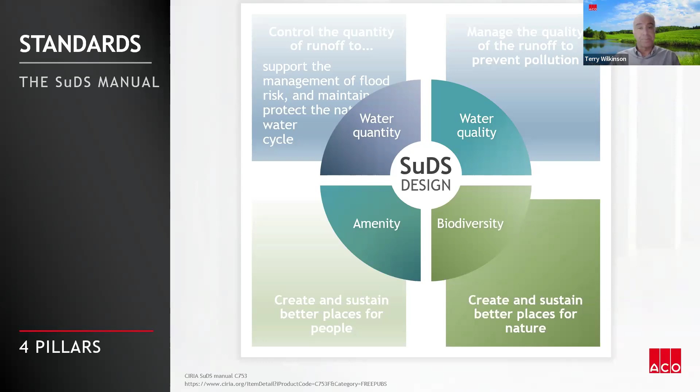Just to set the scene, I'd like to highlight the natural water cycle and the effects of urbanization and development over a number of years, and how that impacts how we think about dealing with rainfall and water.

Increased urbanization and impermeable surfaces means we get less infiltration of water into the ground and soil, because we've created these impermeable areas, creating more runoff. Lower infiltration means less water percolation and flow into the ground, and increased runoff from the surface, which also increases the risk of flash flooding further downstream.

So essentially, we need to try and find a balance with nature, enhance the natural systems around us, and really try to mimic as closely as possible what happens in the natural state, and treat and utilize water as that resource.

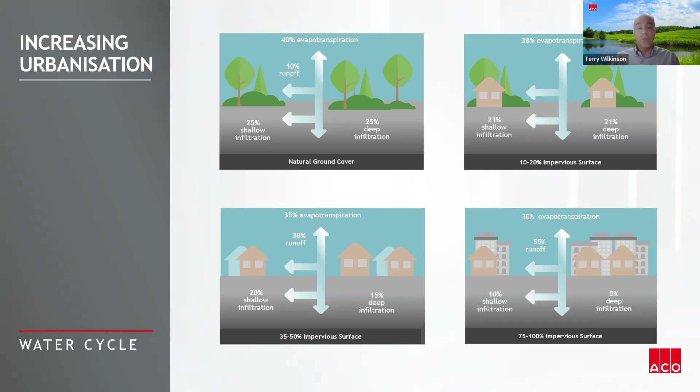As I've said, one of the main SuDS principles is that rainfall should be managed at or as closely as possible to where it falls on the ground, so we look at controlling the volumes and rate of runoff effectively.

We make sure we take every opportunity to reuse, infiltrate, evaporate and evapotranspirate as part of that natural water cycle. Looking at things like harvesting water for use on site at a later time has multiple benefits in terms of reducing the volume of water and potable water demand. So we really need to look to infiltrate into the ground wherever possible and utilize nature-based solutions.

As you'll see through some of the demonstrations and slides I go through, the preference, the first preference, is really to look towards nature-based solutions.

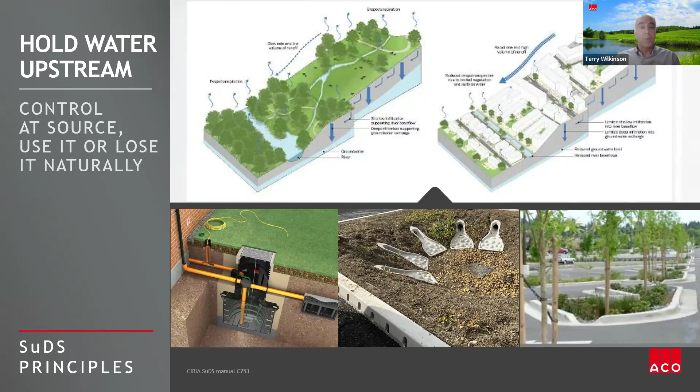Often there's a need to integrate that with engineered solutions as well, when we've got constraints, particularly in terms of things like the footprint of the site and the scope of what we can fit onto the site. Also, when we're looking to protect our natural systems, proprietary treatment systems can be used in tandem with them to utilize the benefits. This really comes into the requirements of SuDS as well. Just a few photos on this slide showing some simple examples of how these principles can be exploited.

Legislation on SuDS varies quite considerably across the UK and Ireland. Wales, for example, has had the implementation of Schedule 3 of the Flood and Water Management Act in force since 2019, requiring SuDS to be used on sites of more than 100 square metres on new sites.

There's a general requirement in Scotland for SuDS, and has been for a number of years. Within Northern Ireland, there's no automatic right anymore to connect new developments to the existing drainage networks.

England has fallen or lagged a bit behind some of the other countries in terms of SuDS. It was the start of last year, 2023, when it was announced that implementation of Schedule 3 would be in place within England by 2024. Obviously, we're almost at the end of 2024 now, and we've heard very little about that since. So hopefully it will still happen, but it's looking like it's being moved back a bit.

Within Ireland, SuDS is required on new developments, except where developers can demonstrate that it's impractical to use them due to site constraints and circumstances. But we're seeing a number of authorities in Ireland now that include recommendations to incorporate and implement SuDS in new developments - Dublin City Council and Wicklow County Council, just a couple of examples. I'm starting to see that more and more there as well.

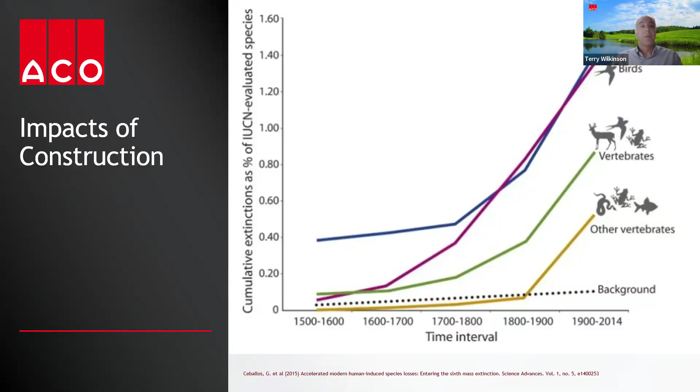Fragmentation is a particularly big issue in terms of species and their ability to move around. Amphibian populations, for example, spend a certain amount of time within ponds and water areas for breeding, but outside of those areas they're land-based and need to move around. So with linear infrastructure like roads and railways, it's had a significant impact in terms of fragmentation, severing the link and the ability of wildlife to move around our networks and roads.

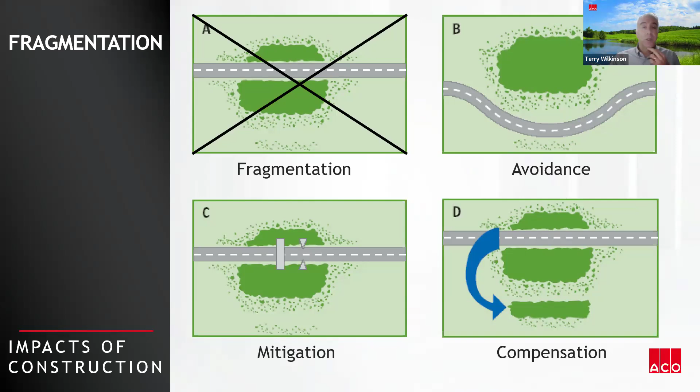So I've mentioned decline - just to highlight a few particular species, particularly in terms of Ireland. Amphibians, the natterjack toad for example - amphibian declines are of major conservation concern worldwide. The natterjack toad is one of, I think, the rarest amphibians in Ireland, and it's been listed as an endangered species. There's also been huge declines of hedgehogs within Britain and Europe, and it's estimated a similar situation is happening within Ireland as well.

Curlew, I've also highlighted as a bird species that's been particularly impacted. Curlew numbers in Ireland have fallen by around 97% since the 1980s - huge impacts there as well in terms of biodiversity.

And then we've also got implications and impacts on our health. The increasing demand for land is placing a lot of pressure on green spaces, which have declined in recent years. Linking this green and blue space, or natural capital, to our health is a growing field, and it's now very well documented that access to green space and spending time in and around wildlife and nature has really significant positive impacts on our health and well-being.

Evidence shows that living in these environments can promote good health and can aid in recovery from illness. People who have greater exposure to green spaces have a range of more beneficial physiological benefits as well.

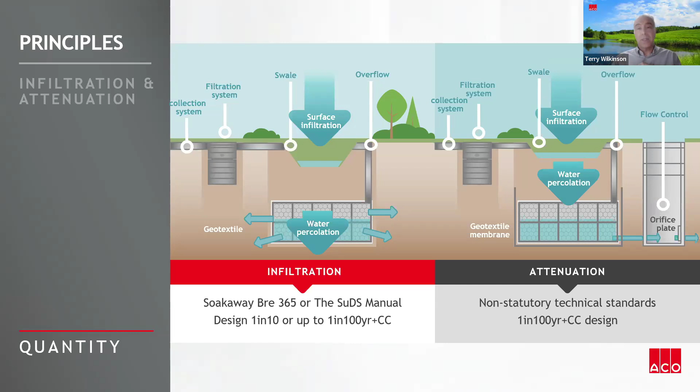In terms of attenuation, it's a similar manner regarding calculating the volume of water - how much is landing on the catchment area. This is where the water is held on site, be that through natural systems like swales, detention basins, or engineered solutions like geocellular systems that can store that water. So containing that water or temporarily storing it on site and then gradually releasing it, typically to meet the natural greenfield response, which tends to be either 2 litres per second per hectare or better, dependent on the requirements for the scheme.

And that's something that will be led by the planning requirements for the scheme. So that's looking at things like geocellular systems, but natural SuDS features like swales can have different parameters when it comes to volume control. Generally they'd be designed for something like the 1 in 30-year storm and have excess flows that then connect into other SuDS features and systems. So if you're limited in terms of site constraints, that might tie into a geocellular system installed underground that it can feed into. Dependent on the site and what's appropriate, there are different options, whether engineered solutions, nature-based solutions, or a mixture of the two.

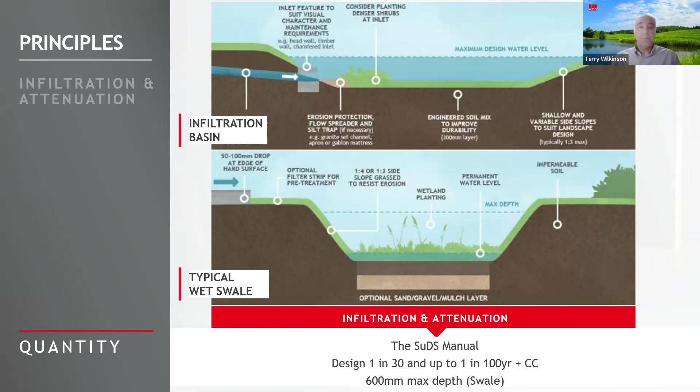Another consideration when we're looking at water quantity, through either infiltration or attenuation, is the amount of space that can be stored within the system - so the porosity or void ratio within the material being used. This is the actual space where water can be stored within the feature. For things like stone or non-compressed soil, that might be somewhere in the region of 30% in terms of its capacity within the overall material. Or for something like a geocellular system, it can be up to a maximum, typically around 97%, in terms of the storage capability.

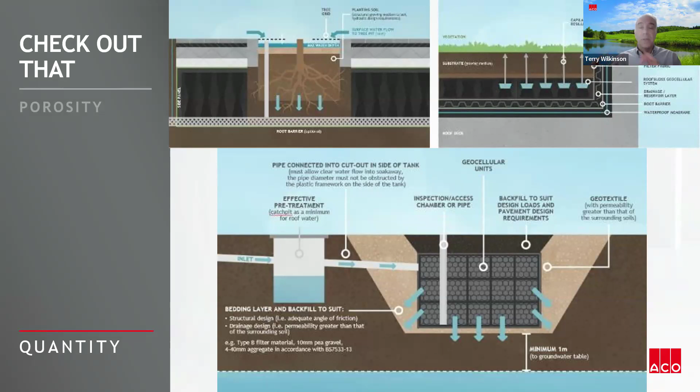So this can become important for sites, particularly when you've got limited space and what we can fit on and within the site. And if we've got low infiltration rates within the ground, then that can be accommodated and calculated for as well.

Not all of our designs or systems will be used for just infiltration or just attenuation - you can have a combination of the two. For example, you might have a pond with a liner that can store up to the 1 in 1 year event, and then to help promote biodiversity and amenity and all the things I've mentioned already, allow infiltration at a higher level than this. So it's permanently got a level of water in it, and anything above that gets either infiltrated or discharged or connected into a separate system.

So you could have a lined wet swale for, say, the 1 in 30-year event, and then have a geocellular tank above it, similar to what I mentioned a minute ago, with that overflow for extreme events as well. On the images here, I've got high overflow indicated on the left-hand image, and this can be an important feature if we're allowing water to cascade into a tank or something like that in the exceedance event.

As well as nature-based solutions and geocellular systems and things like that, other engineered solutions can also accommodate an element of attenuation within our sites. For example, high capacity combined kerb drainage can offer attenuation benefits. I've put an extract up here, referenced in Transport Infrastructure Ireland guidance documentation. Where you're using any system, particularly attenuation systems within part of the network model, it's important that we include that system and component of attenuation as part of the network design.

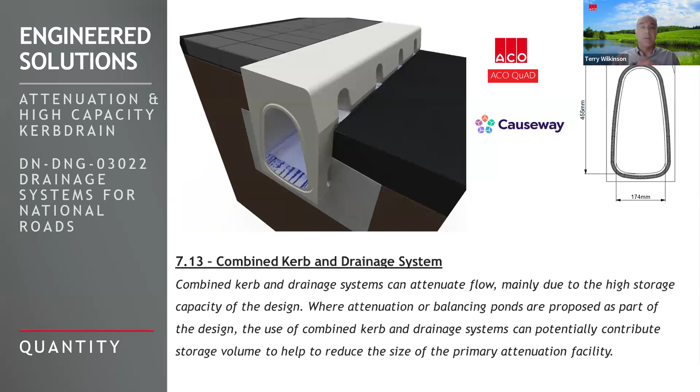So that's water quantity. Moving on to water quality and thinking about how we manage pollution and what we can do to remove that, dependent on the site. For quality, one of the key drivers is to remove as much of the pollutants as possible before it's carried forward into the drainage system or released into the natural environment.

Within the SuDS manual, it splits pollutants down into three categories: total suspended solids (TSS), metals, and hydrocarbons. Just some examples there of where pollution from each of these different categories can come from, and how it gets washed into our drainage network.

It's important to recognize that acute events can also be initiated by activities like salt spreading. In the winter on the highway network, we're putting an awful lot of salt onto the roads to prevent ice forming, and obviously that enters into the wider network. Other things like spillages, whether fuel spillages or anything else, also need to be taken into account and thought of in terms of our water quality.

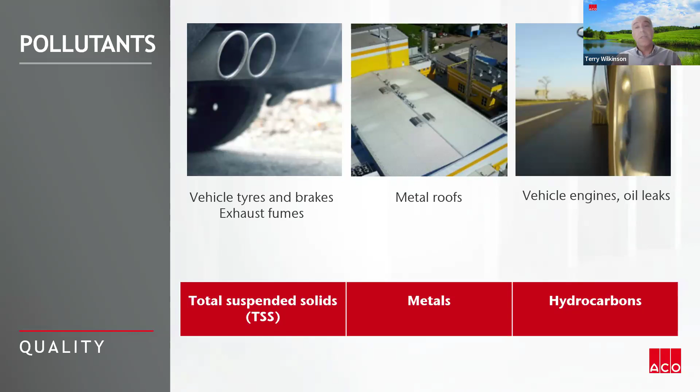As I say, the SuDS manual breaks it down into these three categories. In terms of how we assess that, within the SuDS manual, it's outlined in what they call the simple index approach.

To follow this procedure within the SuDS manual, the first thing we need to do is look at our site and consider what type of site we've got. There's guidance within the SuDS manual in terms of the build up of total suspended solids, metals, and hydrocarbons that you would typically get from these sites.

From the lower pollution sites, such as residential roofs, we've got low values of 0.2, 0.2 and 0.05. Going up to the highest sites, or sites with heavy pollution, those values go much higher. So the first thing to do is to understand the site and what sort of pollution level we're looking at.

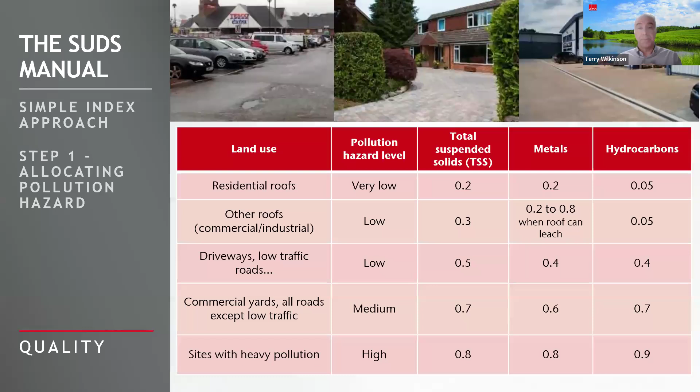And then once we've done that, we can start to consider and assess what sort of treatment solutions we can employ to mitigate and treat against these types of pollutants. Just a few examples on the next couple of slides. As I say, one of the core principles of SuDS is that we treat water at source, as close as possible, whether that be in an engineered or nature-based solution. In some scenarios, we can allow water to flow over the surface.

For example, where there's a desire to convey water and where it's not going to impact in terms of safety for things like buildings, risk to people and that sort of thing. That can be an effective means of conveyance of water, or even understanding where that water will go in the higher storm events.

So an example here of a linear drainage channel system. One of the benefits of this in terms of SuDS is it can keep the inverts high. The higher we can keep water for as long as we can, it gives us more scope and opportunity to treat that water at source. For example, collecting water from a channel and discharging or conveying it into a rain garden or a natural solution like that. Really beneficial in terms of what can be done in terms of SuDS.

A slightly different arrangement here with water coming directly into the channel and leading into a green SuDS feature. The overflow in the example shown here has been set to just below the surfacing layer, and we've got a perforated pipe going into the soil filter medium there. Equally, this could be a pond or other nature-based solution.

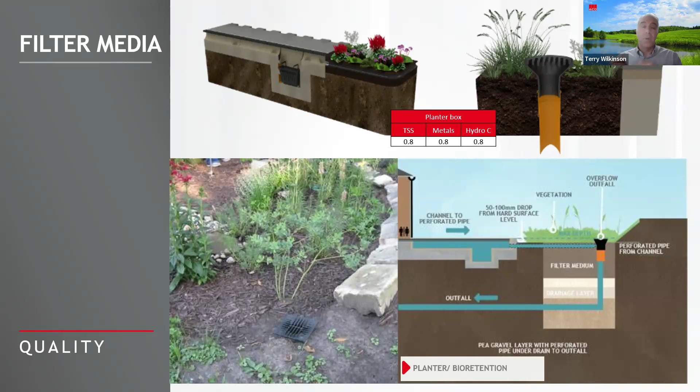So as I say, we identified the site from the first step in terms of the levels of pollutant. Then we can look at and consider the various SuDS features to treat that. Just some examples here of both proprietary systems on the left and natural systems on the right, in terms of some of the treatment values that these systems can accommodate.

So for nature-based solutions, you can go to the SuDS manual and it will give these values in terms of the mitigation indices. For proprietary systems, like the one shown on the left, go to drainage manufacturers such as ourselves at ACO, and we will provide these for the particular type of treatment system being looked at. Each one can remove a proportion of allocated pollution as well.

And it can be used as a single feature, or it can be used in a treatment train. Often you'll see them designed as treatment trains - multiple solutions in tandem in order to treat the pollution levels that we've got there.

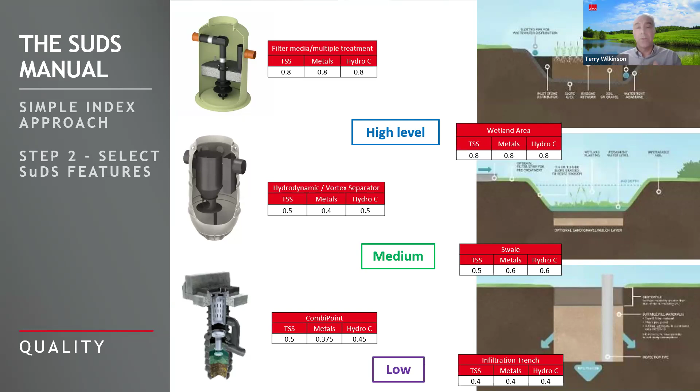And then simplistically how we can look at this in a calculation. So I've got an example site here we've looked at for an HGV lorry park. This is considered one of the highest levels of pollution, so you can see they're 0.8, 0.8, and 0.9 in terms of our TSS, metals, and hydrocarbons.

So then what we do, we can look at our SuDS systems. In this instance, we'll be looking at putting a treatment train in. So proposing the first system here, a proprietary filtration system. You can see from the treatment values here, we've got 0.8, 0.8, 0.8.

So what that means is that in terms of the TSS, that meets the pollution load there. In terms of the metals, it meets it there as well because of the 0.8. But you can see in terms of hydrocarbons, we've got 0.9 on the site, but it only treats to 0.8 of that. So what we need is a further system in place, or a further treatment train, to enable treatment of the hydrocarbons as well.

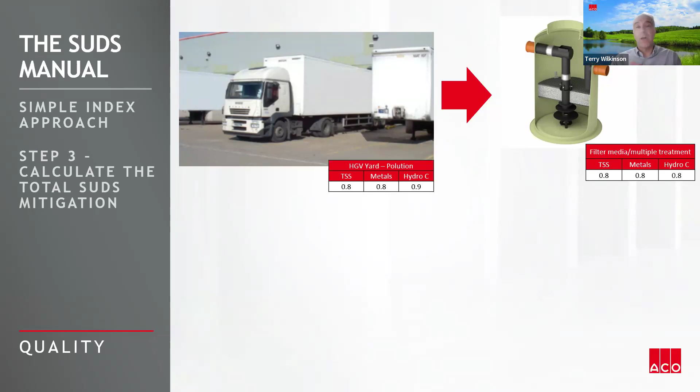So what we're proposing here is taking that into a filtration system, and then the second treatment train is putting it into a swale. You can see that swale has values there in terms of TSS, metals, and hydrocarbons. The calculation for it, for the first part of the treatment train, you take the full values there, so the 0.8, 0.8, 0.8.

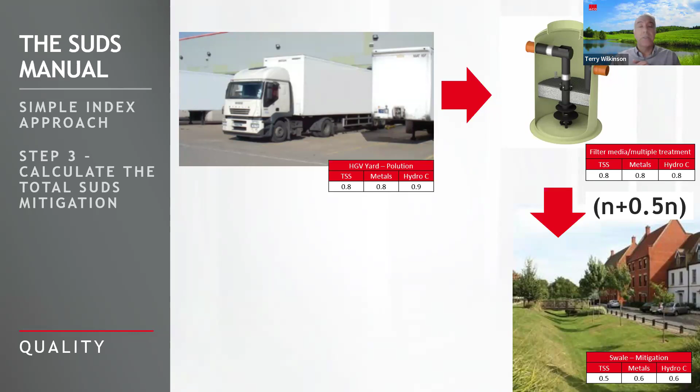But where you've got secondary features, you only allow for half of the mitigation indices of that particular treatment system. The reason is that because the first level of treatment, the filtration system, is already removing an amount of pollution, we have less pollutants in the further treatment trains, so we reduce the mitigation indices by half.

So the total in this scenario: for TSS, we've got the 0.8 from the filtration system plus half of the 0.5 value of the swale, which gives us 1.05. We know that meets the TSS requirement. Similar for the metals. And for the hydrocarbon, where it didn't meet it just with the filtration system, we take the 0.8 to start with, plus half of the 0.6 from the swale, which gives us 1.1.

So overall, those three values meet the mitigation requirements within that, so that would be a suitable treatment system. We then need to think about sizing it - that's the principle of removing the pollutants, but we also need to size the systems appropriately for the required flow rates we've got.

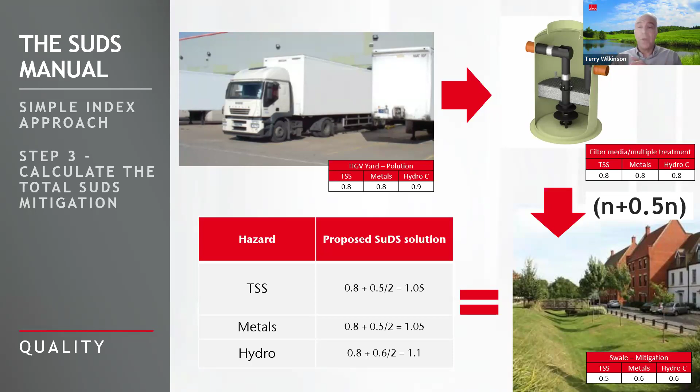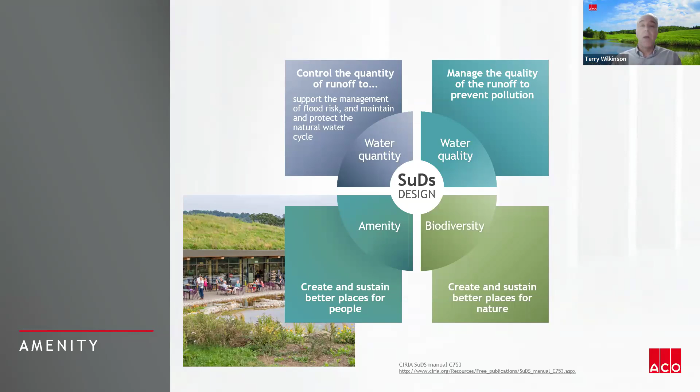So that was looking at quantity and then quality, and then moving on to amenity - how and why we can use water to our benefit to provide amenity, to create and sustain better places for us to live and move around in. Within the SuDS manual, it says good urban design aims to deliver attractive, pleasant, useful, and above all livable urban environments. One of the keys to creating these tangible spaces is looking at water reuse.

We can have seating areas, running routes, things like that. But there's also less tangible spaces with things like visible living walls, green and blue roofs, and that sort of thing - something that can't have that direct, tangible link. The aspiration of amenity is to use water as a resource and help create these features within the landscapes, with a few options, ideas, and benefits that can be offered.

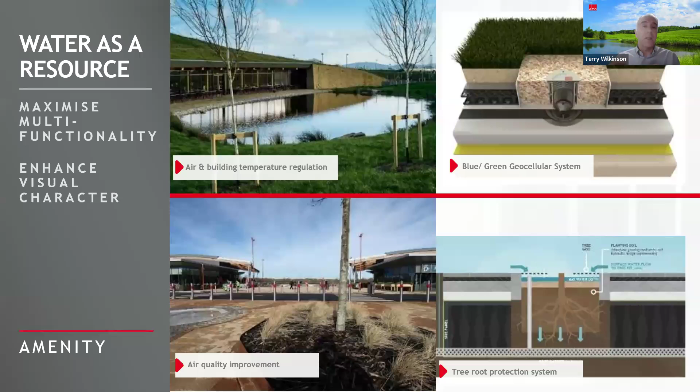Ideally, as I mentioned at the start, we want to link this to human health as well. The drivers mentioned at the start noted that spending time within these green spaces increases our health, recovery time for illness, and that sort of thing. So the creation of these good green-blue spaces has a really positive knock-on effect for our health and for the habitats, acting as an amenity benefit in that regard.

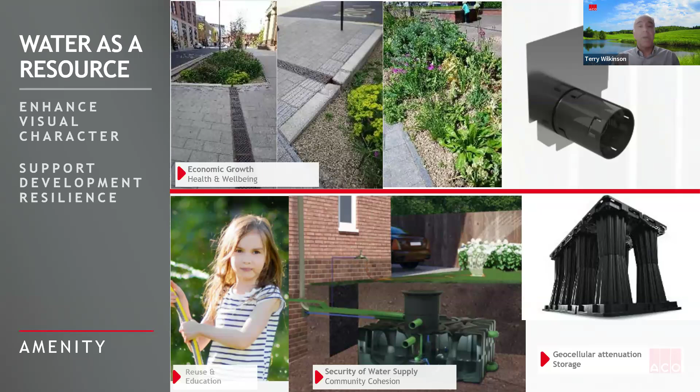We can utilize things like recreational areas, such as parks and sports fields, not only for the purpose they're there for, but as great areas for amenity that can also act as good reservoirs for attenuating exceedance events. So when we've got extreme storm events, in scenarios where these areas aren't going to be used at that time for what they're designed for, designing them for exceedance and to take those excess flows temporarily can be a really good solution.

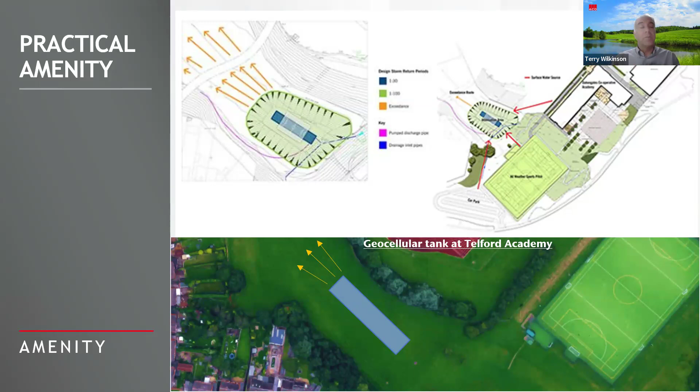This is a simple example of a school site we worked on a number of years back, where the scheme was designed to hold the 1 in 30 year storage volume underground, but in the really extreme events, the 1 in 100 year event, the surface of the playing field was utilised to temporarily store and hold that water - taking the benefits and utilising that in terms of amenity.

And then the last of the 4 SuDS pillars is biodiversity. Within the SuDS manual, one of the things it talks about in terms of designing for biodiversity is the importance of linking habitats. I mentioned about fragmentation at the start, where we've got roads and linear infrastructure cutting off those migration routes for amphibians.

Within the SuDS manual, it says that habitats within SuDS schemes should be designed to provide links with other local and regional habitats, so we can help enhance and build up that habitat connectivity that may have been lost, or in terms of new developments, prevent that fragmentation, mitigating problems associated with habitat loss in urban areas and enhancing opportunities for biodiversity to thrive.

SuDS schemes should aim to have a range of different habitat types that will encourage all types of biodiversity, helping to create sustaining and resilient ecosystems.

There's various guidance from different authorities, from highway authorities and local authorities, and a lot of this guidance will follow the mitigation hierarchy I spoke about at the start: avoiding those impacts, then looking to minimise, mitigate, and as a last resort, compensate.

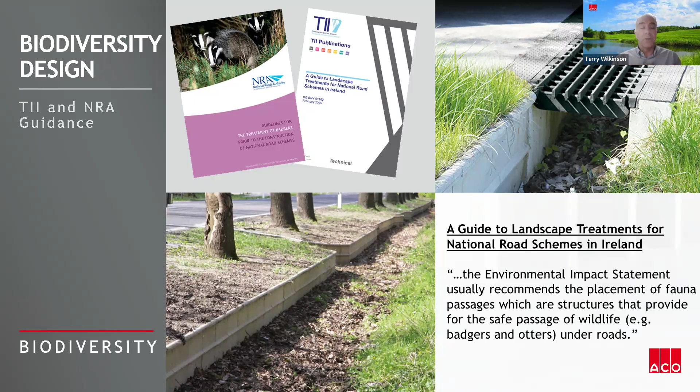A couple of specific documents, one from TII and one from NRA, relate to biodiversity design and guidance. I've put an extract from one of those documents mentioning environmental impact statements, noting that placement of fauna passages can help create a path for animals to move safely under roads.

Pictured here I've got a variety of solutions that can be employed to do this. We've got conveyance by means of wildlife tunnels and culverts - two or three different examples. There's a culvert on the left, a wildlife tunnel in the middle installed very high up at the road surface, and on the right you can see the entrance going into the road, but it's actually buried under the carriageway itself.

Dependent on things like the species, the size of species, and where they're going to and from, would help determine what the appropriate solution is. This is where engineers and ecologists should really be working together right from the outset, to understand not only the ecological constraints but also the engineering constraints, to provide a solution that works and meets all the requirements.

On this next slide I've got a brief video of an actual site that incorporated these sorts of systems - we've got the tunnels there, and also one thing I didn't mention is the combined amphibian trap and tunnel.

That acts as a means of connecting the guide walls, where you've got say a sidewall access, but has very large inlets at the top, so it prevents small amphibians from being able to climb over them. What happens is they fall through into the base of the tunnel, and then continue on their path via the guide wall.

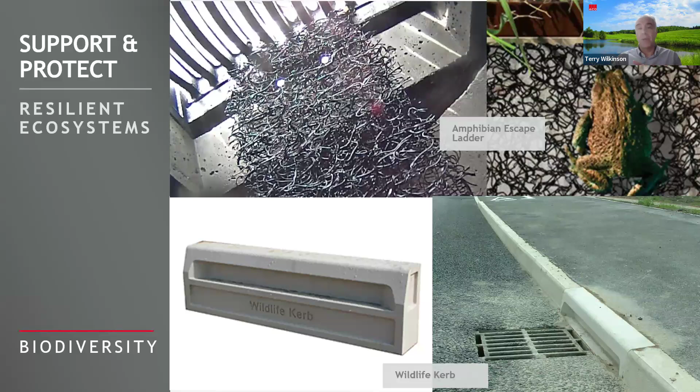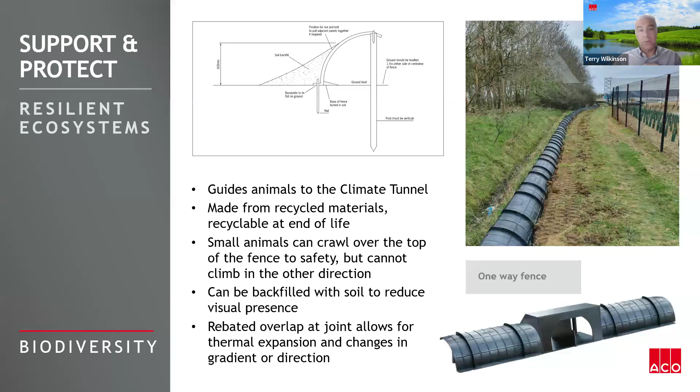I've shown guide walls, and variations on that include guide fencing - this is a one-way fence. You can see from its design that it's a curved panel, and as its name suggests, it allows movement in one direction. From the photograph, any amphibians or small animals on the right-hand side were able to traverse over that fence, climb over it, and safely drop to the other side, but anything coming from the left would be prevented from accessing it. These can also be tied into crossing points, underpasses, by means of a tunnel entrance, shown in the bottom right image.

For all diverse ranges of plants and animal species to thrive, we need to create different varieties in terms of landscapes and planting. As mentioned within the SuDS manual, it talks about having a variety of habitats to incorporate this as well.

We also need to think about the type of environment they're going to be in terms of surface water. If they're going to be permanently or very infrequently exposed to water, we need hardier plantings that are more able to cope with that. Conversely, for areas where they're often within or submerged within water, we need to choose the appropriate planting that can work in those sorts of areas.

That's where the different disciplines work together - ecologists and landscape architects choosing the right habitat enhancements and working with engineers to make sure we can provide solutions that can thrive.

For enhancement of biodiversity using water features, we try to maximise shallow and occasionally inundated areas of pond vegetation - areas more resistant to pollution that can have high ecological value. So we look to design systems where some areas are not exposed to every runoff event or fed from separate runoff sources, with lesser polluted areas, like runoff from roofs, incorporated into the relevant areas.

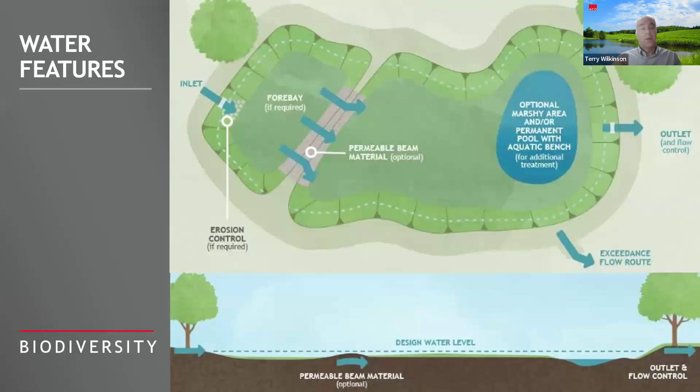I just wanted to finish up with a couple of case studies. The first is a site that's been in for a number of years, and the second is a few images of a recent site that the owner and myself have been involved in, in Ireland. The first site I wanted to show is a site in Scotland from a few years ago - one of the lochs, Frankfield Loch, was part of a wetland park with a large area of woodland, reed beds and marshland. The site was a real haven for wildlife habitat and supported a range of species, from amphibians to small mammals.

From the image on the site, you can see the new housing estate shown in that dotted red line. The road that connected that housing estate to the main road development cut across the path between the loch on the left and the marshland on the right.

So what was proposed here was designed at the early stages between ecologists and engineers, with the ecologists understanding the species on site, where they're moving to and from, and choosing correct locations for underpasses.

Shown as 1, 2, 3 on the plan, we've got 3 tunnels going under the road, and then that blue line providing a connecting feature in terms of guide fencing to connect between the tunnels and also extending beyond them to provide as far a scope as possible in funneling the wildlife into the tunnels.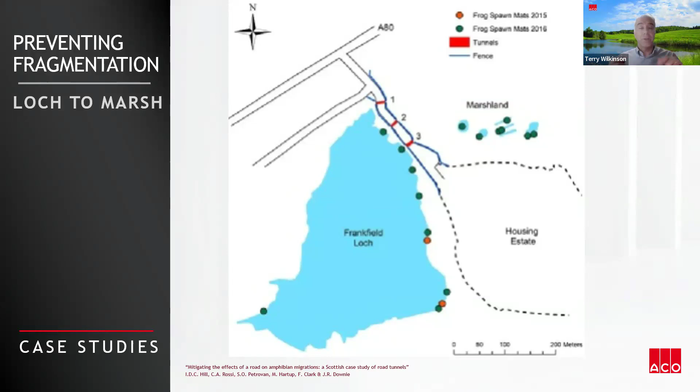So 3 tunnels were selected, spread over about 100 meters along that road, 50 meters apart, and then another 50 meters of guide wall either side of that.

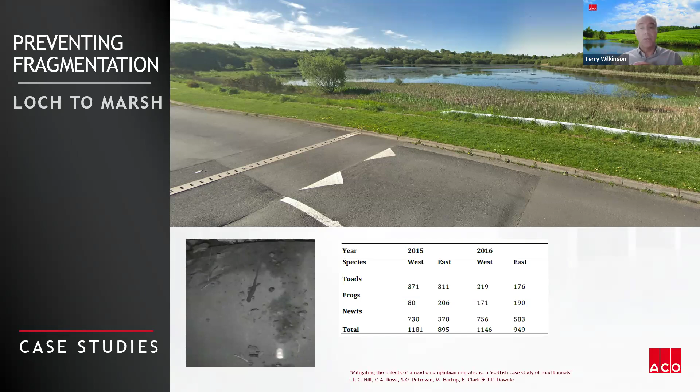So it's really encouraging to see these sorts of solutions being used. We also supported a student from Nottingham Trent University at the time who was doing a lot of work on hedgehogs.

She was studying how and where hedgehogs move around, and she did some monitoring on that site, which showed really encouraging results in terms of hedgehogs using the tunnels. She kindly sent through a couple of videos she captured while monitoring. Although they weren't designed with hedgehogs in mind, it's great that other species are using them, particularly with hedgehogs given their numbers are in quite stark decline.

The tunnel that's just been installed is one of the first of 3 proposed on the site, and it was required to support safe movement and protection of amphibians on the site that rely on watercourses and water bodies in and around the area, being able to move around.